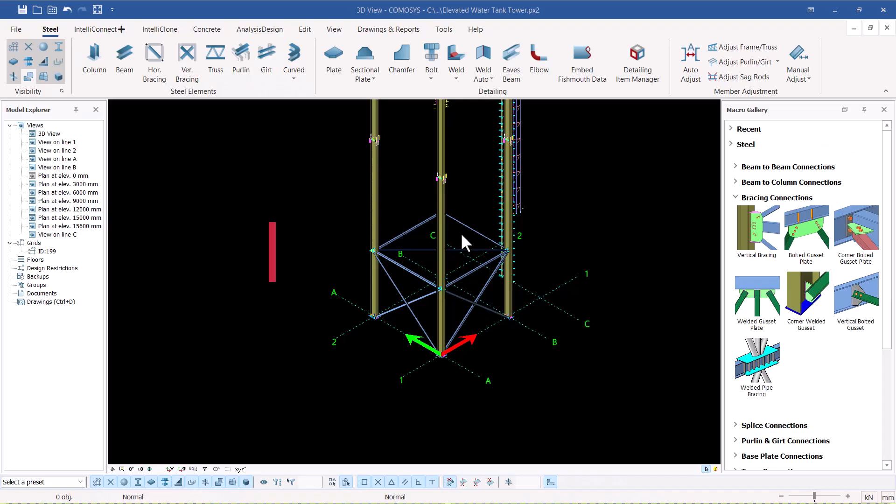We left off at this stage, and now we want to mirror this on the other end. I'll select this, right click, go to special copy, and pick mirror. I'll use the same mirror line, click run to copy the same members on the other side. Then select this, right click, special copy, mirror, and snap this side to create a mirror line, click on that, and I'll have my points on the other end.

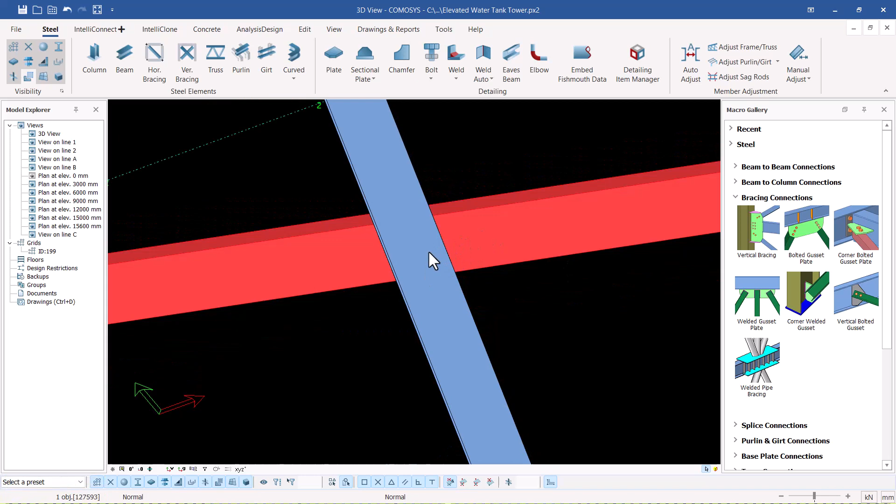There's some adjustment you need to make, because if you want to create a bolt between these two points, they have to turn their backs at a certain measurement. So on this one I've used 8 millimeters, so that when we turn this around, we'll be able to place our bolt to bolt these two together.

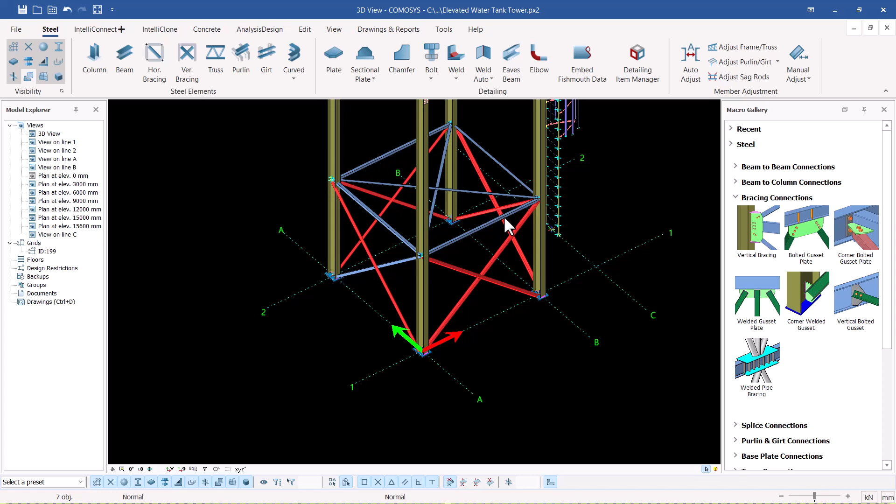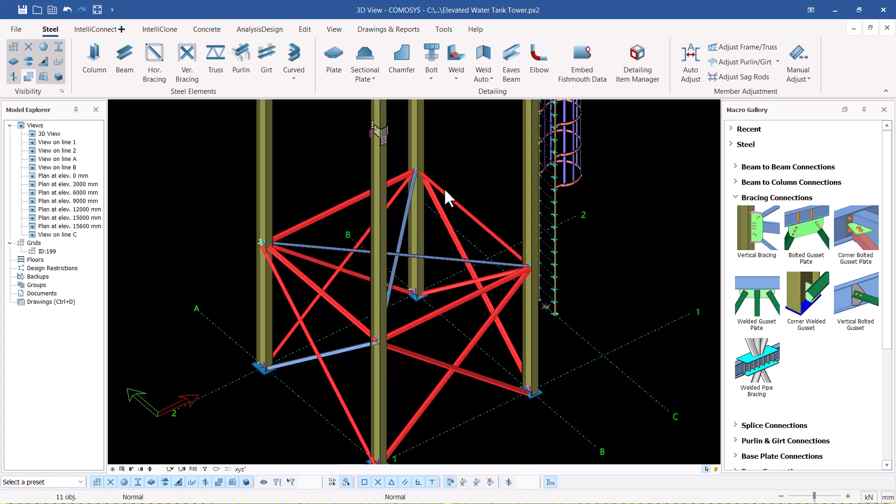This should be self-explanatory and easily done. If I select this, press Control and select that, and that also, I want to populate this upward. I've also left out my vertical bracings, so I'll only pick these ones and leave the vertical bracings in place. I'll right click and come to special copy, and pick linear.

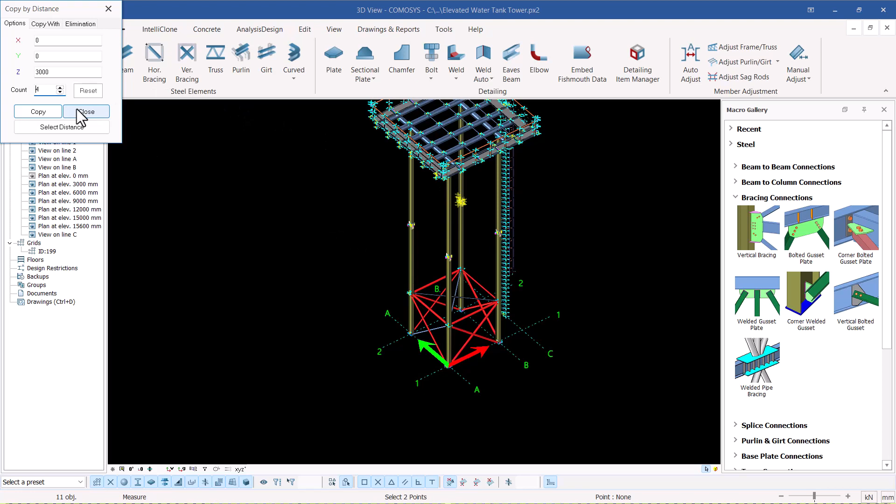From linear, how many levels do I have? I have 1, 2, 3, 4. So I'll feed in 4 here. Since we're moving in the positive direction of the z-axis, I'll click OK, copy. Once copied, if I turn it around, I'll be able to see all my braces in place.

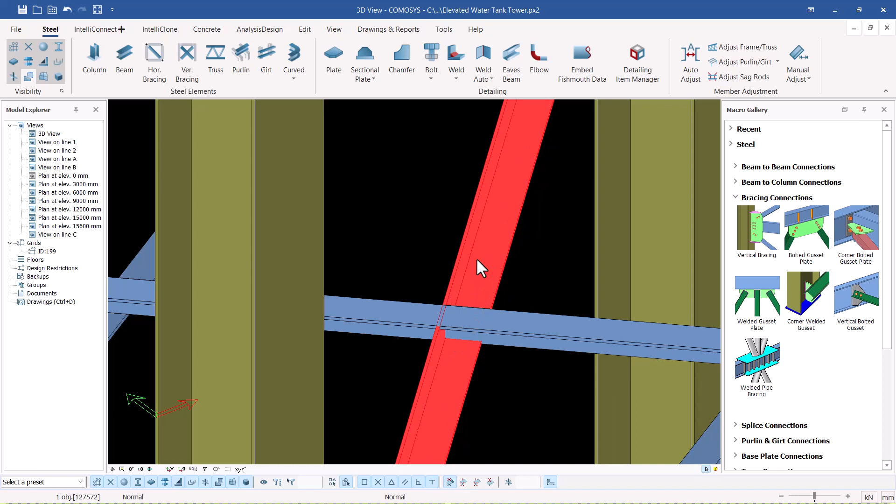The reason I left this one out is because I need to turn it to make it boltable, to make bolting easy. So I select this, then press Ctrl Q. The moment I press Ctrl Q, I select it. Since the size of this member is 70, I want to offset it up to let it sit on top of this member with a gap of 8 millimeters, so we'll have a button plate in between to act like a spacer for bolting.

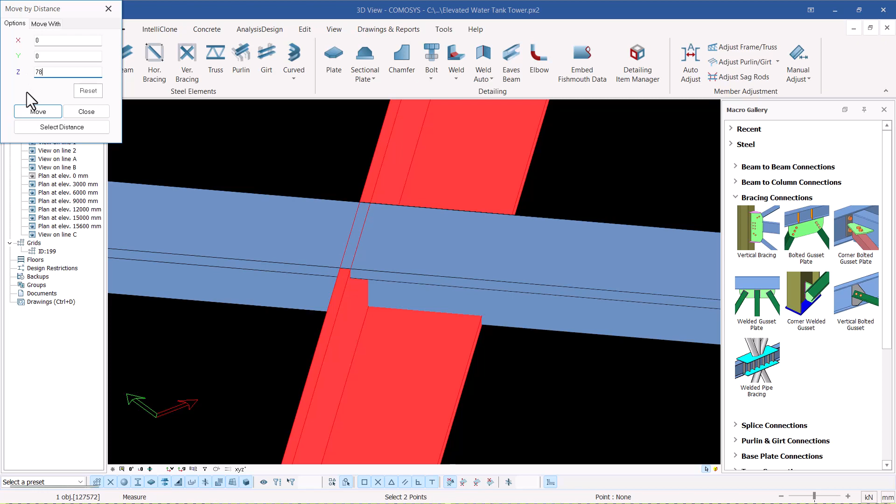I'll select this member, select that, and select this, right click and go to special move. Once in special move, I want to move it up by 78 — that's 78 including the 8 millimeters. I'll move it up slightly like that and close that, so I'll also have some way of connecting that and that.

Once done, I can now include them on the other bracing. I'll right click, special copy, and take it up by 3 meters. 3 meters — how many do we need? We need 4 of them. If I click on that, I'll have all of them in place.

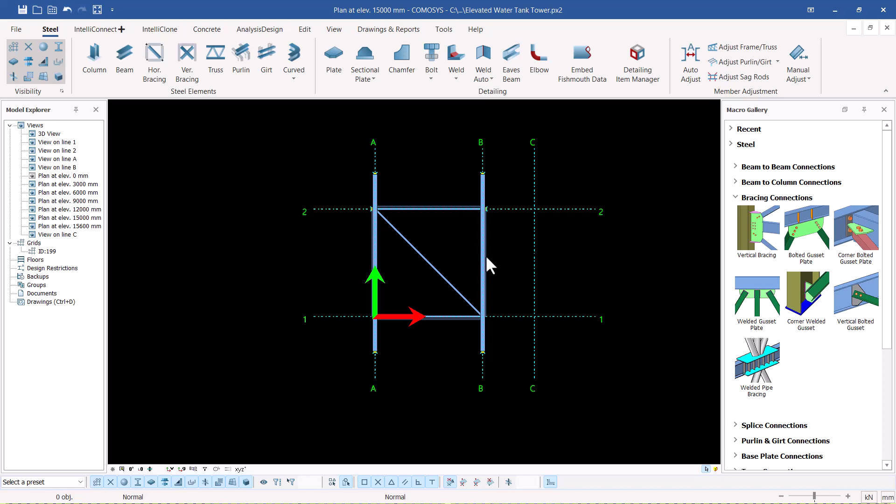To confirm, if I come to level 15 and double click, I'll see only 1 — and that's the problem. We didn't select everything correctly, so I'll undo that.

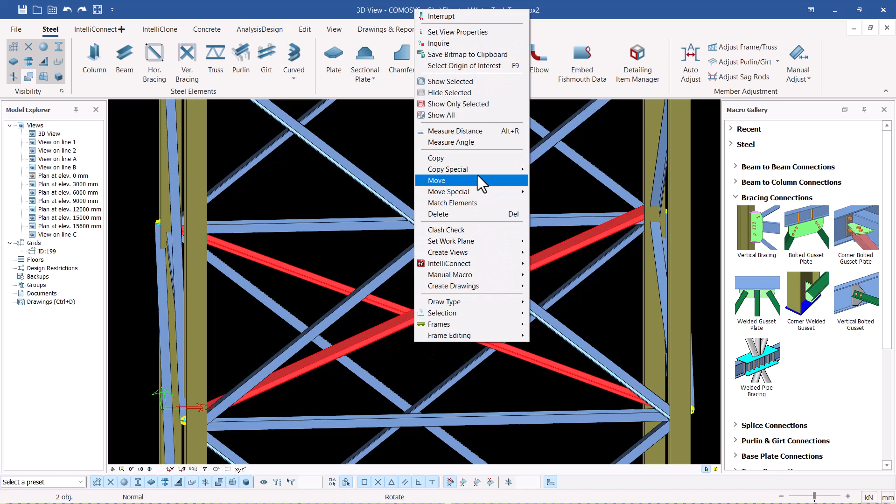Let me turn that around so we don't have members clashing. I'll select that, right click, special copy, pick linear again, and let it go up to 4, click OK. If I close that and check level 15, I'm still only seeing that one. At level 9 I can see 2, at level 12 I can see all of them, and at level 15 — so the actual levels are from 3 to 12.

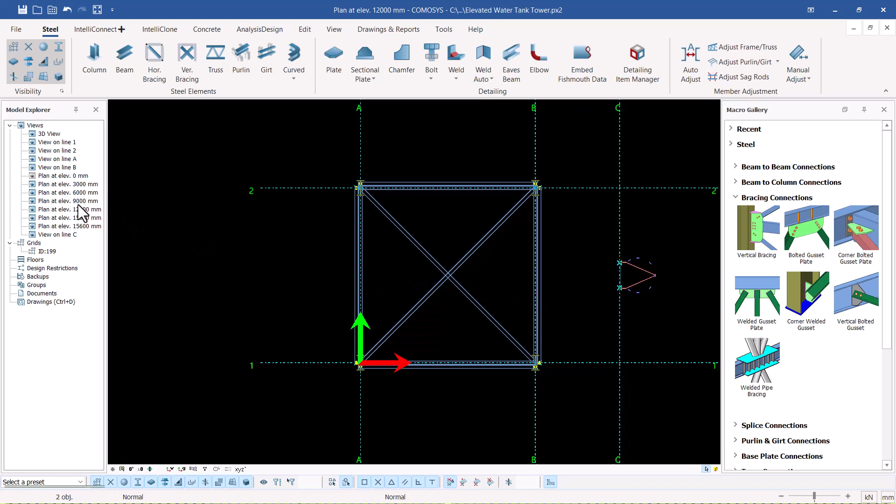I'll switch back to isometric view. I want to start creating the connection, so I'll use the bolted gusset plate here. I want to weld this.

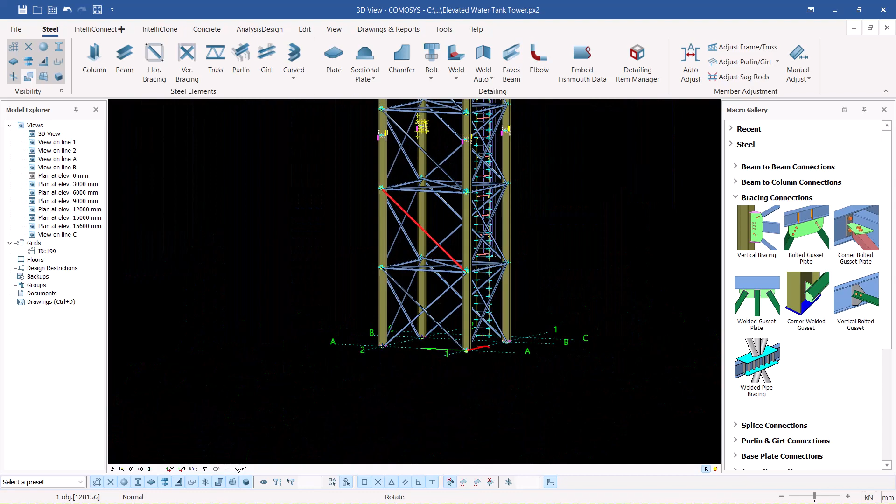You can see some confusion here. So what we're going to do is select this, right click, special copy, pick linear, to make that correction. I'll add 4 of them and click OK.

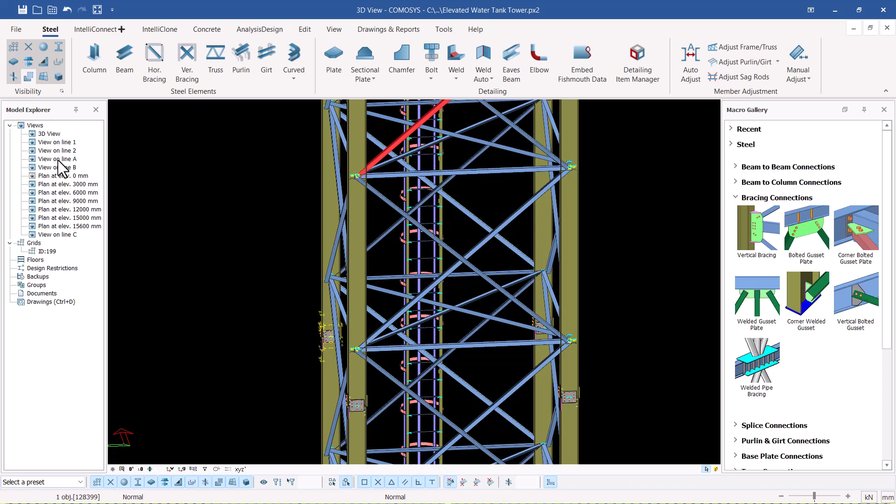If I come back and double click on elevation A, I'll see all my bracings in place. If I click on view line 1, I'll see all my bracings in place, and on view line 2 as well, I'll see all my bracings in place.

Let me switch back to 3D so we can start creating the gusset plate connection between the column and our bracings. I'll come to the bolted gusset plate here and pick this member, that member, and this member.

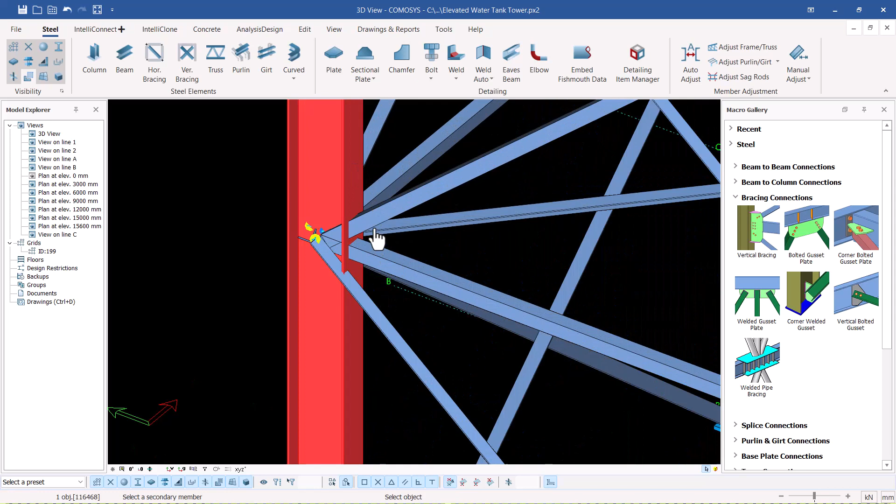Right click and come to that level, right click and select that member, press letter M, press enter to bring up the editor box where you'll be able to customize that connection using a gusset plate. Let's give it some time, it will pop up, and here it is.

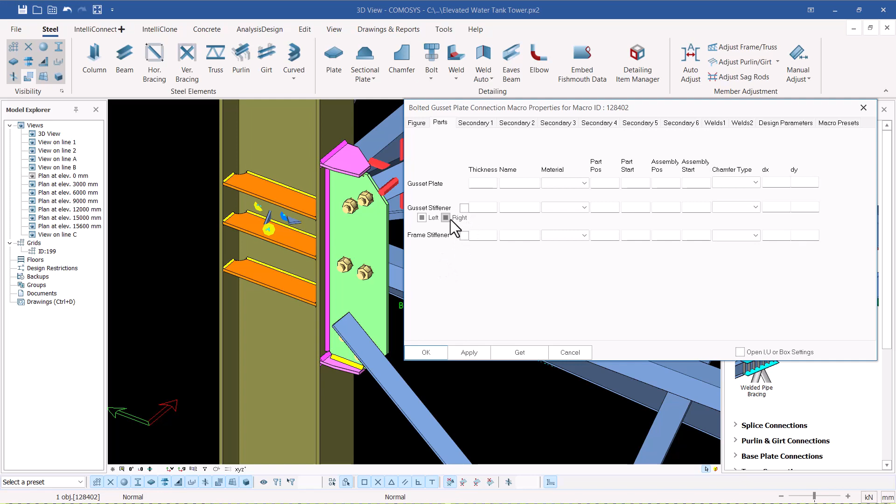If we come to parts, here we don't need any gusset. We don't need this stiffener, we don't need this stiffener. We just need to get rid of them by checking each one, and click apply, and we have that all in place.

So we'll go ahead and do the same thing, select on that, select on this, right click, and we have our connection in place. I can just click on it, press M and enter to edit that.

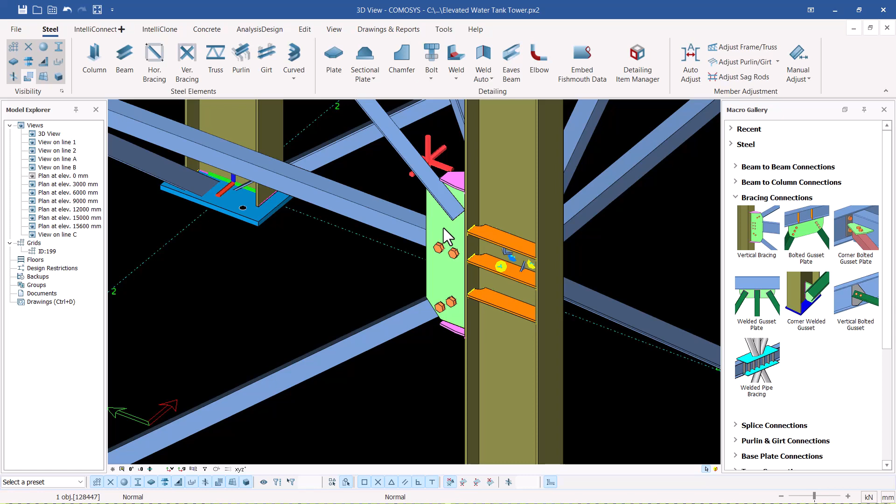Let's give it some time. There we are, and we go to parts and we get rid of what we don't want to be seen. We don't need any gusset right there.

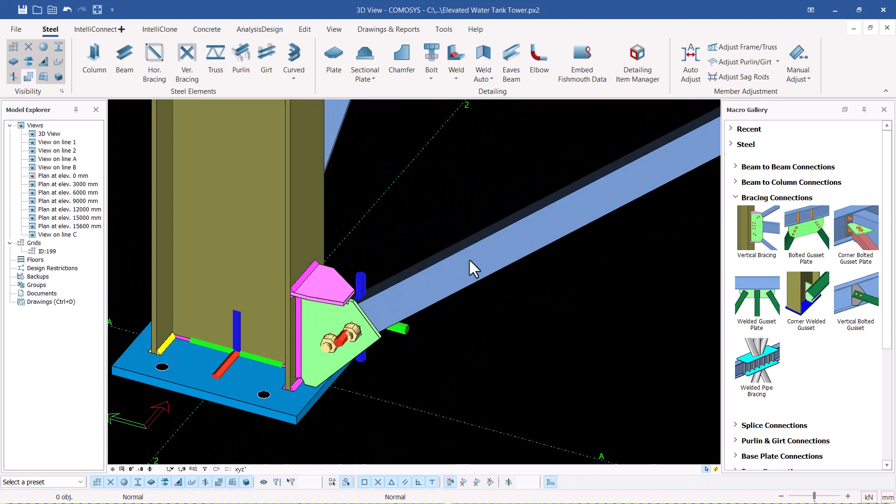If I come here, I'll also be able to create a gusset plate between that member and this member, and that will be done. If I double click on that spot, I'll be able to see I have my gusset plate already created there. So you can see that.

Perfect, so I'll come here again and do the same thing. Select on that, and select on the plate surface, right click and select on that and turn that around. You can see I've created a connection right there.

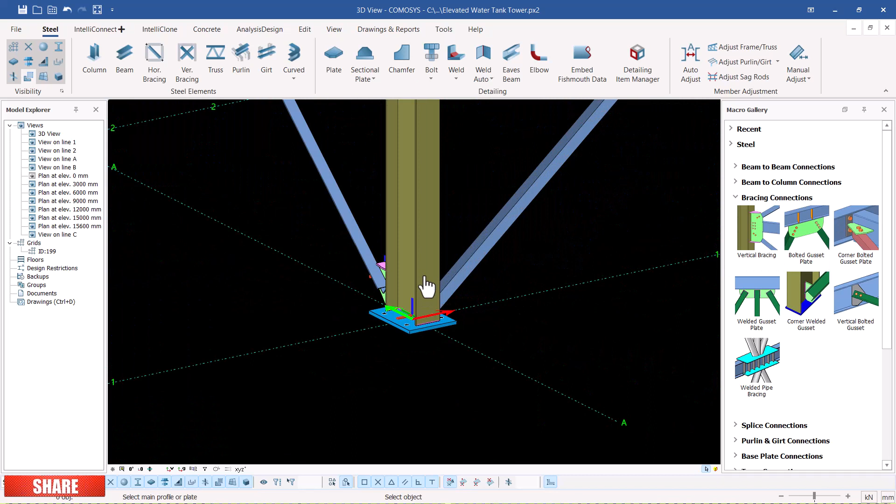So we can go ahead and do the same thing here. Select that, and right click to create a connection between this member, that member, and the plate, and we have a connection right there.

So we can go ahead and do the same thing here. Select that member and select that member, right click to create a connection. So we have that in place.

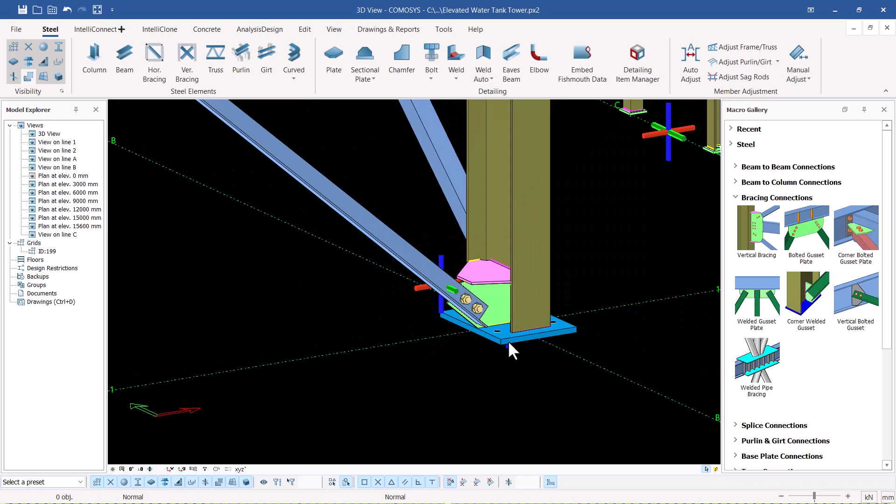We haven't connected this, let's do that, and the surface of the plate, right click and we turn that round like that and create a connection here. Connect that to that and this one, and we have a connection in place.

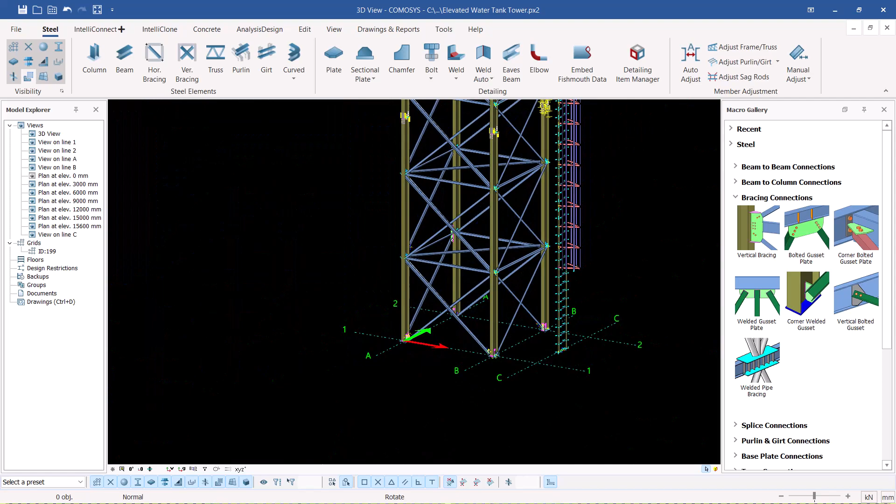If I turn it around like that, we'll be able to see our connection is super nice. This is fantastic, and this is how you can do it.

So let's try create a connection between this member, that member, this member, and this member, and right click, and we have a connection there.

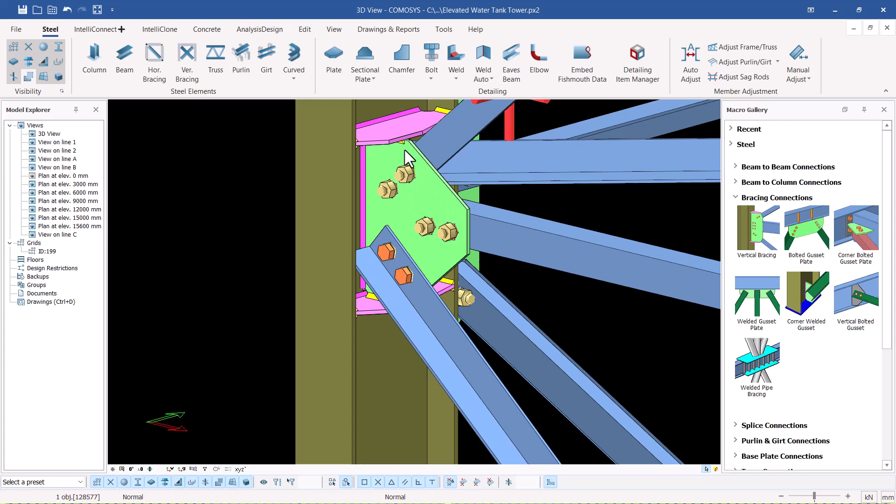So in here we have to customize this. We'll select on that, then press letter M and press enter on your keyboard and give it some time to come up, because the profile of this gusset plate is not good for me.

We want to customize it to look similar to the other one also. So what I'm going to do is just use my presets here, and if I come here and load that, and click that, we have our gusset plate in place. So this is how it looks, and probably okay, not bad.

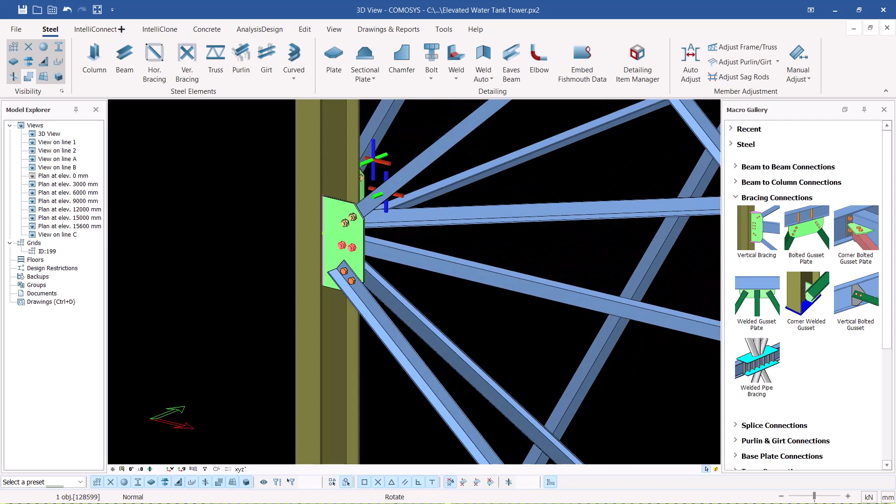So what I'm going to do is select this. Once I've selected on that, I'm going to clone. Let's try to see whether clone will work, and press on that.

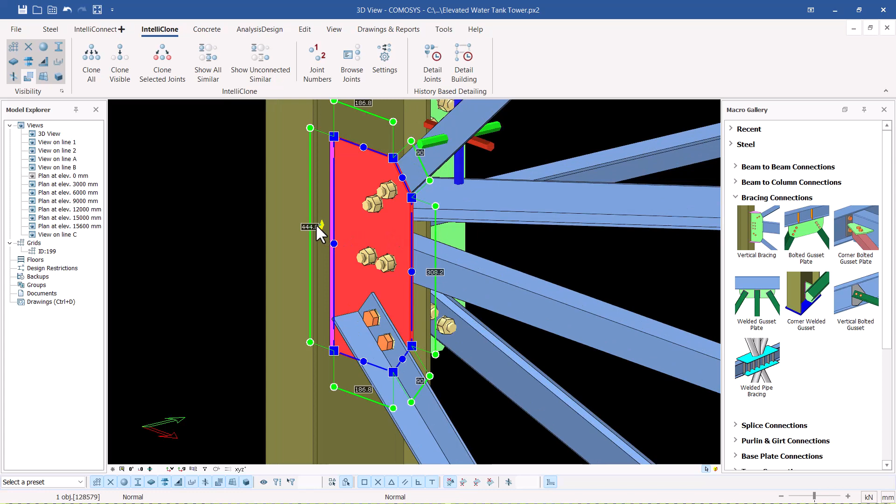More than one node has been selected, we've been told that. So let me select that and select one node here, press Control, select a node. Right click, maybe click clone, and we have five of them.

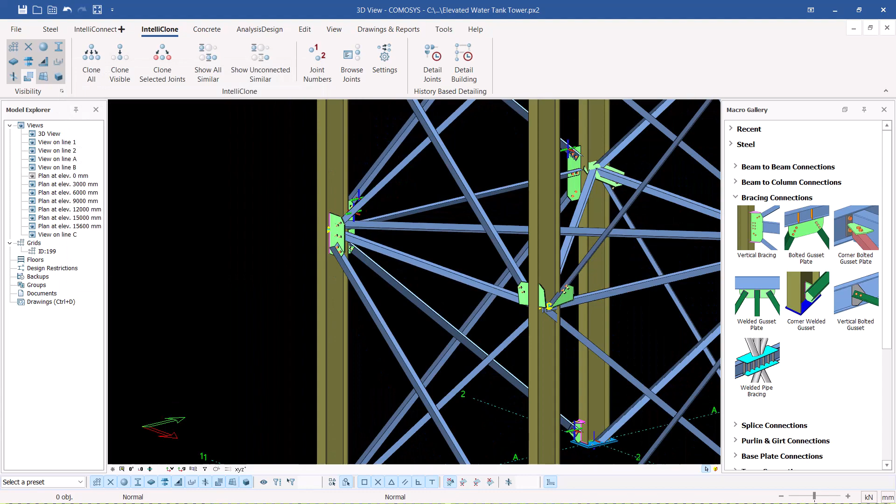Similar joints, so if we click proceed, one is not connected to the joint, so we can just go ahead and click ignore and maybe see how it looks. If you turn up, we'll be able to see this is not right.

So we either go the manual way of connection, because the cloning is messing up slightly.

So I'll come back here once again and create a connection between these two members, this member, that member, and that member, and right click, and we have members are not on the same plane.

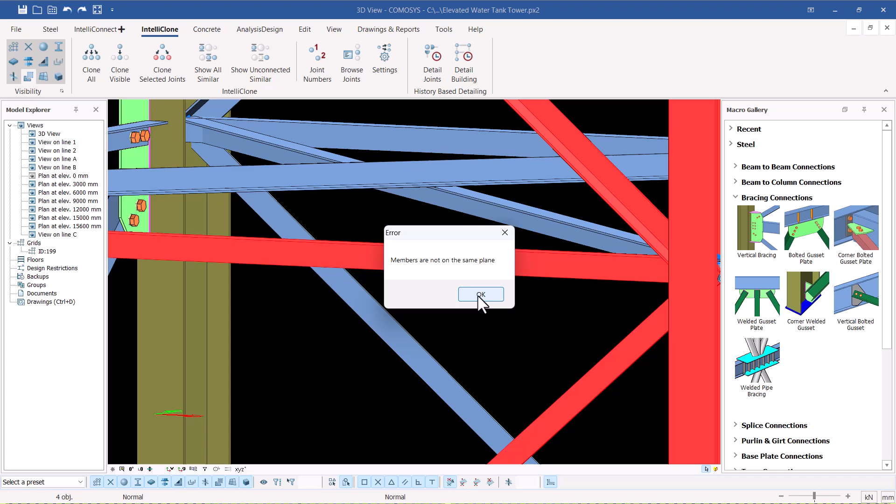So let me turn that around. Select on that, this member, that, and that, and right click. So we have that member in place.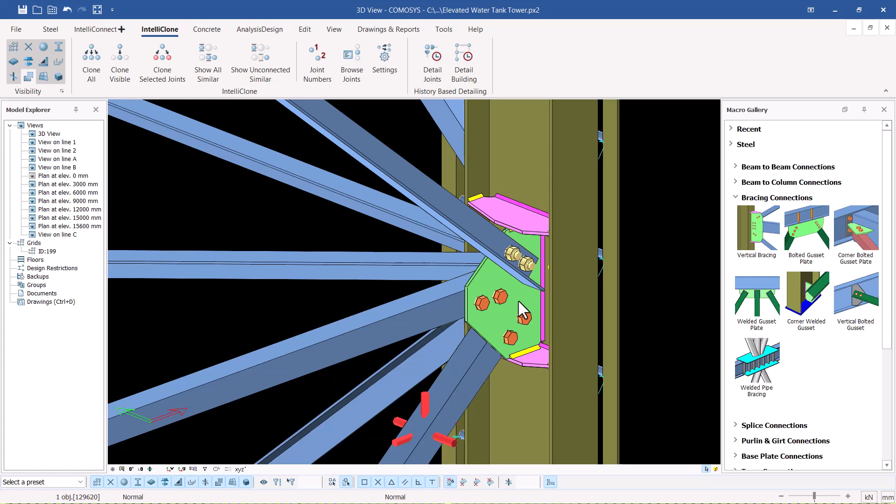So if I double select on that, press letter M and enter, we'll have our dialog box coming up, and that's the place where we'll customize the appropriate connection.

Let's give it some time to appear, and we use our preset here. Just select on that, select on it, and load that, and apply and give it an OK. So we have our plate in place. We have this in place, but it's not the best way it should be.

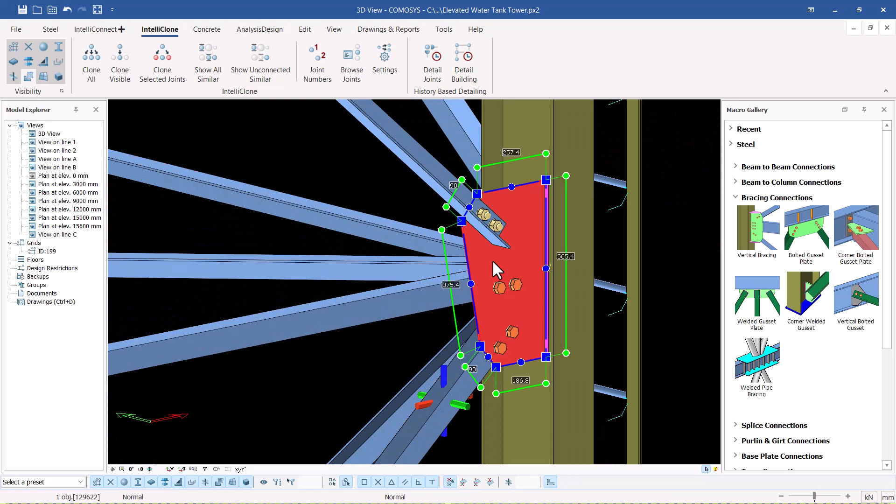So what we're going to do, we are going to select on it, select on it once again, enter that, enter that, we'll give some time to come up.

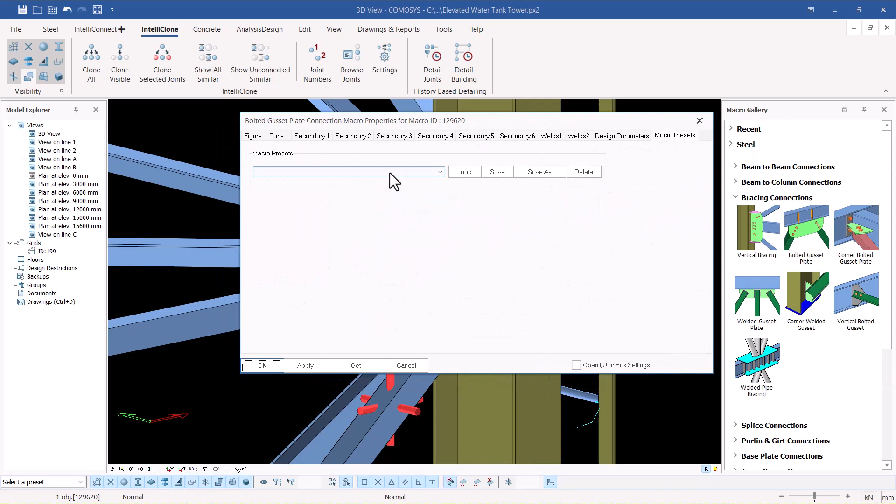This is dependent on the computer speed, and we want to change the settings here because the profile of that particular gusset plate is not good. I'll load that. Remember, these settings can be done by yourself, and this one looks like this.